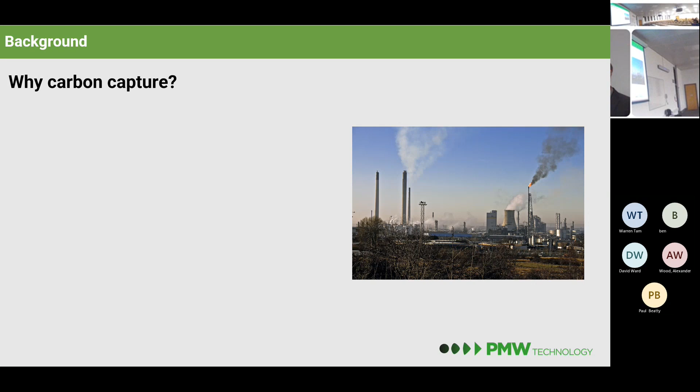Carbon capture. Why do we do it? Why do we even think of doing it? Well, the starting point and ending point for a lot of this is minimising the carbon impacts on the climate change we're suffering. Plants like the one on the right there at Stanlow tip out millions of tons of carbon dioxide a year and make a serious difference to the UK's contribution to climate change. So reducing that is only a good thing, and the sooner we can do it, the better.

Technologies have been a real challenge moving forward with carbon capture. I'll talk a little about those, but also about what we've done and where we're going with our technology.

So the intention here is to cut unavoidable carbon emissions. There are many industrial processes that don't just emit carbon dioxide because they burn fuel, but because of the chemistry of the processes involved. So brick making, ceramics, glass making, even oil refining - there's an unavoidable element of carbon emission from the processes being done. No amount of hydrogen or renewable energy will replace those elements; you have to deal with them as carbon dioxide emissions.

We also have a shorter term problem. By 2050, whatever will have happened, between now and then we've got a whole load of investment in existing plant, machinery, processes, and industries that have a commercial value drawn from existing assets that emit carbon. We can't simply switch off the fossil fuel. We have to move away from fossil fuel in a controlled way that doesn't destroy the economy on the route. So we have to have some means, and carbon capture is one of those bridging routes which will enable us to move from where we are now to an ideally zero carbon future.

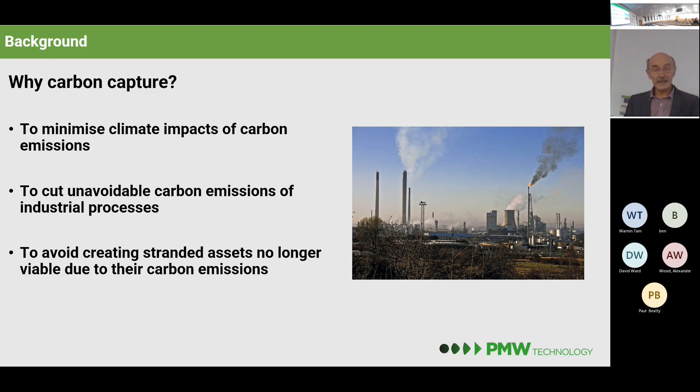One of the key questions with carbon capture is, what do we do with the carbon dioxide? It's all very well saying we can capture it - where does it go, what do we do with it? It's not a simple problem that we can put it in a landfill site and forget about it. It's not that kind of stuff.

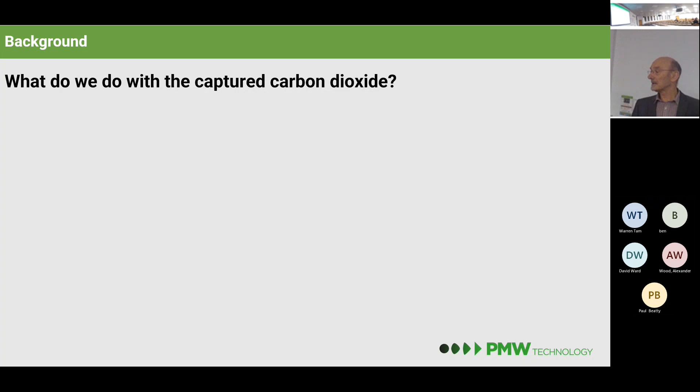So geological sequestration is the classic solution and is already practiced in a number of countries around the world. The point here is that you are basically putting it away under the ground, ideally in a position where the chemistry of the subsurface conditions will ultimately result in the carbon dioxide being fixed in the rock and not coming back. That would happen in saline aquifers, and salt caverns can do those kinds of chemical things. Depleted oil reservoirs probably will hold the carbon dioxide in much the same way as they've held methane and other hydrocarbon gases underground for hundreds of thousands, even millions of years.

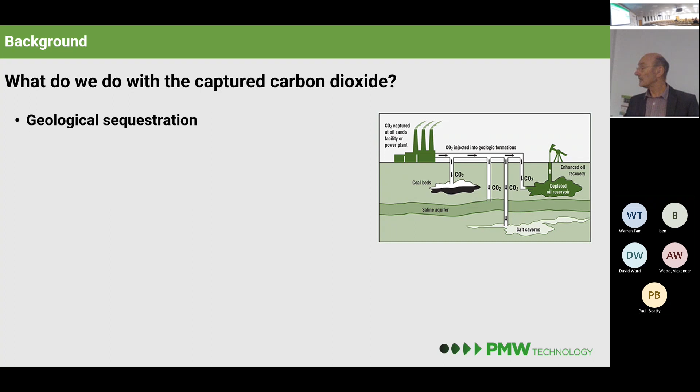So disposal is one way of dealing with carbon capture. It's not ideal because there's always the chance of things coming back before reactions are complete. There are also questions of liability and ownership of the carbon dioxide under the ground. Who is to look after it? Who is to deal with it? Who is to pay for putting that stuff underground?

The favoured option is to use magnesium oxide or hydroxide minerals reacted with carbon dioxide to produce magnesium carbonate. This is basically ground up rock absorbing carbon dioxide and chemically fixing it as a building material, making a form of concrete or plaster that fixes the carbon dioxide as part of a mineral.

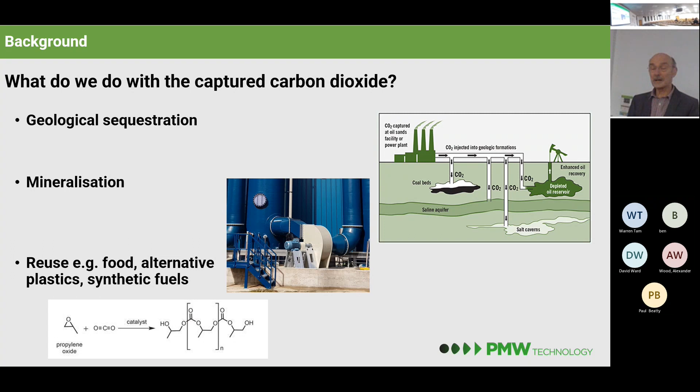You can also create synthetic fuels from carbon dioxide. You can react carbon dioxide with hydrogen to produce methanol, or you can produce methane or other hydrocarbons with varying degrees of efficiency.

One application we see as very attractive is what we call the methanol cycle. For long haul shipping, it's difficult to carry enough renewable energy. Batteries simply aren't enough, and you can't realistically carry around liquid hydrogen as your fuel produced from renewable energy. So forming another chemical compound is a preferable solution.

Producing methanol from hydrogen can be done quite efficiently. Methanol is a liquid fuel, a bit like gasoline. It can be burnt in conventional engines, and you can capture the carbon dioxide on board ship using a process like ours to bring the carbon dioxide back for reuse with more hydrogen, so you're effectively using carbon dioxide as a carrier for hydrogen to deliver it on board ship, and you can take your ship around the world with that.

This is certainly of interest, and we're in discussion with a number of shipping fleet operators who are interested in the idea. If nothing else, because if they own a solar farm in Australia, they can produce their own hydrogen, recirculate the carbon dioxide on their own ships, and become completely independent of anybody producing fossil fuel, so they have complete control over the economics of shipping their product.

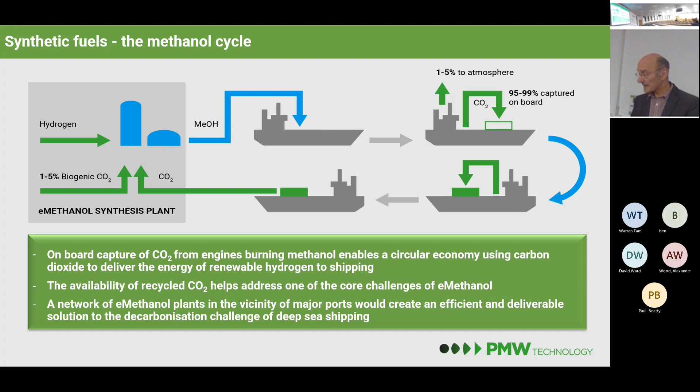So this is quite a valuable step forward, and it really moves carbon capture from being a rubbish processing operation for sequestration, effectively landfill, to being a recycling operation, a circular economy. That's certainly a prospect that is going forward.

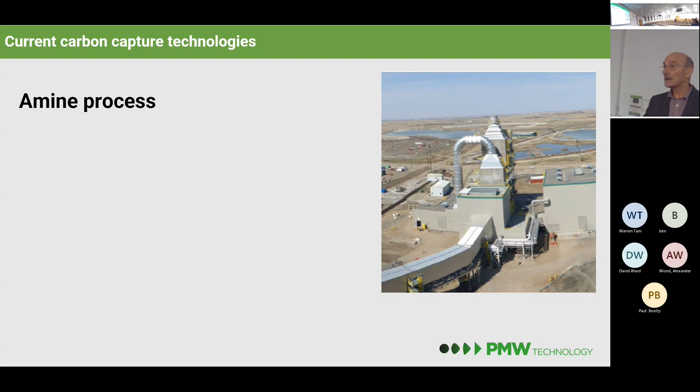Let's look at some processes. The classic process is the so-called amine process. Amines are organic versions of ammonia that will react with carbon dioxide, so basically you dissolve the carbon dioxide in this solution.

To get the carbon dioxide back out again and regenerate your solution, you have to heat it, so it consumes a bunch of energy needed to recover it. This picture here is the Boundary Dam demonstrator plant in Canada that cleans up the exhaust gases of a power station. It's a substantial piece of plant for a relatively small power station.

Unfortunately, the amine solution is hazardous. You don't want to let it out in the environment. It's damaging to natural life, and it's also, unfortunately, bad for human beings, so you don't really want to handle it either.

But worse, the contaminants of the exhaust gases from combustion can often contain sulfur oxides, nitrogen oxides, and that degrades the amine. So you actually have to take a slipstream of amine off to clean it up or replace it with new, which means handling, more processing, more risks to the environment.

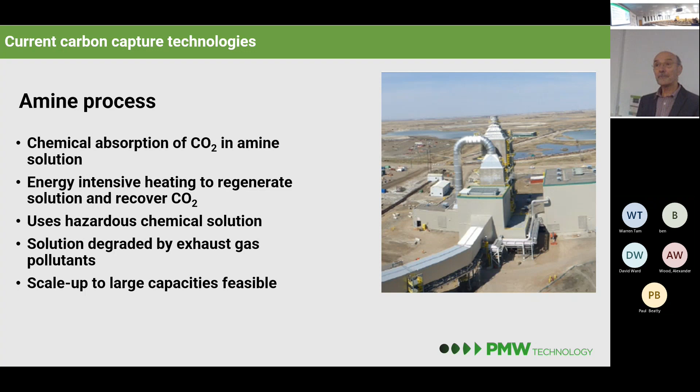One of the advantages of this process is that it is relatively straightforward to scale up. If you wanted one of these things larger than Boundary Dam, it just means a whole load, either more or bigger absorption columns, more heat required to recover the carbon dioxide. But fundamentally, it's a big chemical process, and you can manage that.

An alternative process that's widely used for natural gas processes is the membrane separation process. This has a membrane that is selectively porous to carbon dioxide. Unfortunately, it requires a significant difference in pressure, so we have an energy requirement to compress particularly exhaust gases to do such separation.

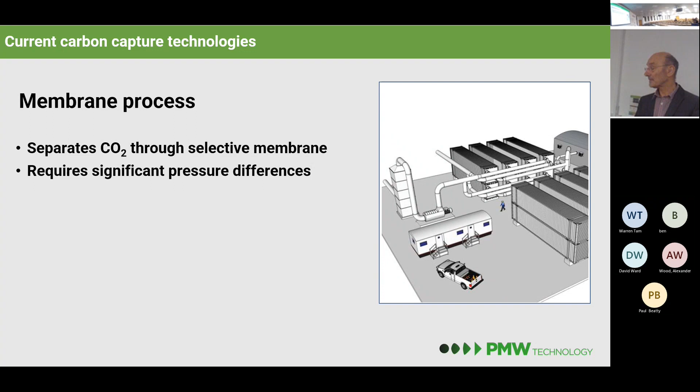And it has limited selectivity, so it will achieve a reasonable separation in one stage, but generally requires multiple stages to get reasonable purity of carbon dioxide and an adequate level of removal, like 90%, from the exhaust gases. So it's energy intensive, and the limited permeability of the membrane means you have lots of them.

So you have crates and crates of stacked up membranes, each membrane being a kind of cylindrical bundle in a pressure tube with the gases coming in on one side, separated gases coming out on the other. Quite a hefty process. And again, unfortunately, contaminants in our exhaust gases are very bad news, as they degrade the membrane so that over a number of years, the membrane becomes worn out and not so selective.

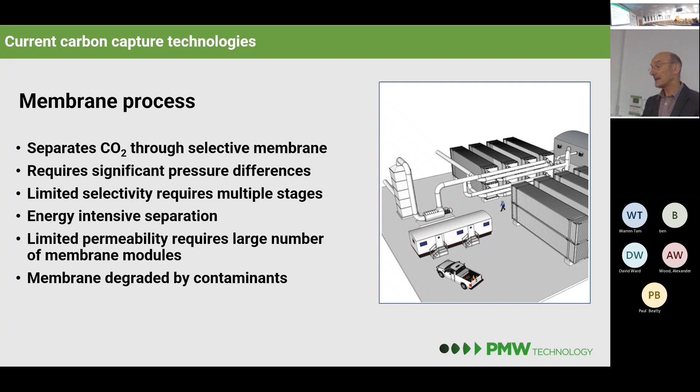So you have to invest in the expensive part of the process being replaced at intervals through life. At the moment, this one is not really considered a suitable process for exhaust gas cleaning up. It does work relatively well with natural gas processing, where there is already pressure to drive the process, and removing say 80% of the carbon dioxide is enough for the purposes.

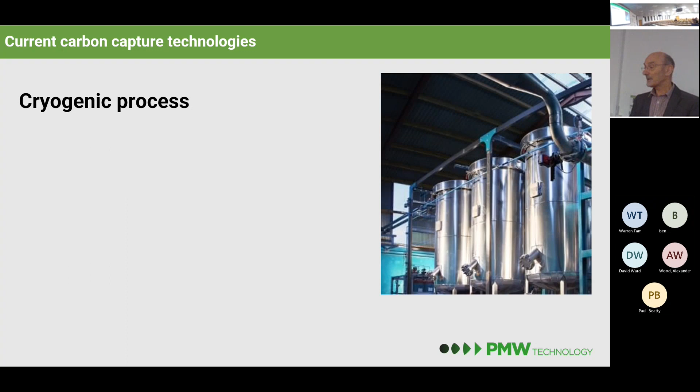And there are cryogenic processes. Ours is a cryogenic process, but the classic cryogenic process separates carbon dioxide by desublimation. It exploits the strange property of carbon dioxide that when you cool it at atmospheric pressure, it never condenses as a liquid, it goes straight to solid frost. So that means that you can run your cold box with heat exchanger, and you will frost up, just like you freeze up the inside of your refrigerator. It will frost up with carbon dioxide on the heat exchanger surface. And then all you do is you switch your heat exchanger to being warmed to melt the stuff or evaporate it off again, and you can recover your carbon dioxide.

Unfortunately, the frost of carbon dioxide on the outside of the heat exchanger degrades performance, so you need extra large areas. And then because you're alternating melting and capturing, you need multiple sets of surface. So it's 3 times as much of expensive surface. So it makes it an expensive process. And the scale up becomes quite difficult because the sheer area of surface you require in your heat exchangers becomes unmanageable.

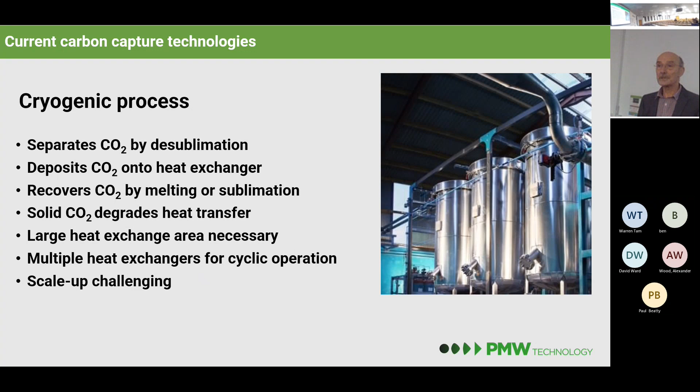So our process is also a cryogenic process. We use low temperatures again to capture the carbon dioxide as a solid. But rather than having a fixed heat exchanger, we use fine metallic beads. It could be ceramic or glass. But the beads act as an intermediary for the cold and capture the carbon dioxide.

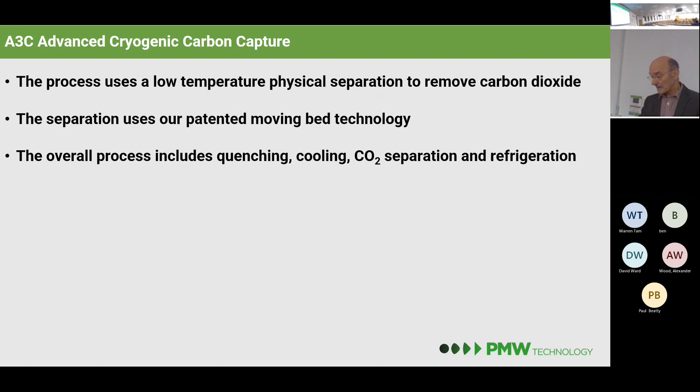Overall, the process starts by quenching exhaust gases to a starting low temperature. Then we have a cooling stage that takes them down to about -100 degrees, which is just a straightforward regenerative heat exchanger, using the treated gases to recover the energy. Then we have a separation step where we cool things further to get the carbon dioxide separated. And we have a refrigeration process wrapped around this to provide the drive to keep the cold.

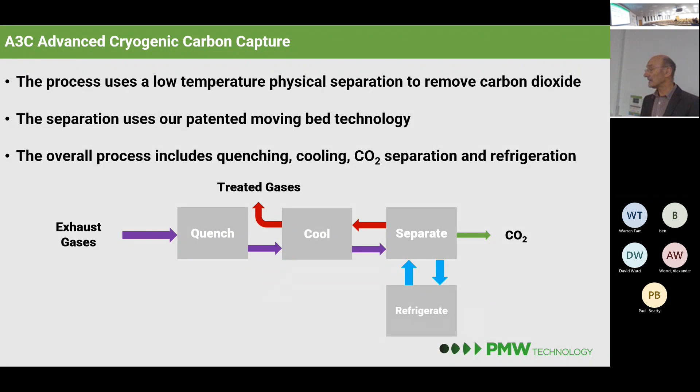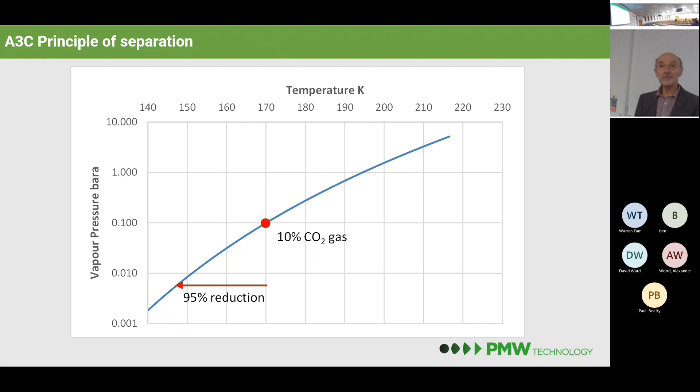We calculated that the energy penalty of going to 99.5% from 90% is only 25% more energy to get there. Whereas the big chemical processes like amine will never get to 99.5% because the column would be hundreds of meters high to achieve an equilibrium over that chemistry. So the process is inherently rather attractive.

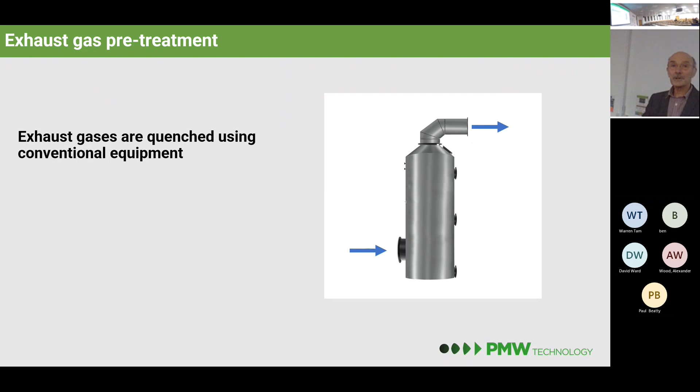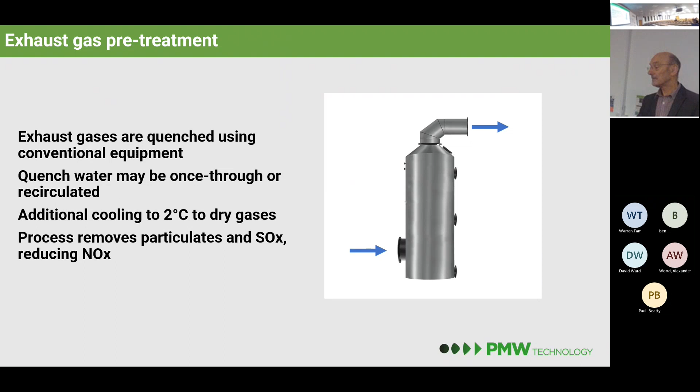The starting point is that we quench, as I said, and we use conventional equipment. It looks like a tank with water splashing down inside it. They can be recirculated, it can be once through. We put some additional cold in because we don't want too much water content of the gases at the end. So we try and get down to about 2 degrees centigrade. And because we're washing, literally, the gases, we take out particulates and sulfur oxides and some of the NOx.

In that process, because we're going down from roughly freezing point down to -100, the traces of water that remain, a few hundred parts per million in the gases, are frozen out onto the surface of those beads and ultimately depart with the exhaust gases. And the contaminants like nitrogen dioxide freeze out and again are released back into the exhaust gases. The other contaminant gases, nitric oxide, carbon monoxide, are present in too low a concentration to be affected by the cold processes. They simply stay as gases and pass through the process entirely unchanged.

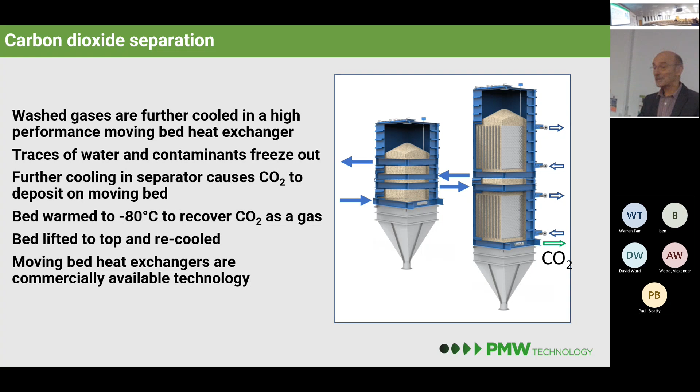These use technology that's relatively commercially available. I've hacked about manufacturers' pictures to produce these images; they're on the web. Refrigeration is an important part of this process and is actually quite vital to how we minimize the energy. There are 2 different processes we can use: there's a conventional process called mixed refrigerant, where you have 2 different gases that condense at different temperatures and pressures.

Or you can use a nitrogen cycle technology, which is like a gas turbine, except being used to produce cold rather than generate power from heat. We prefer the nitrogen cycle because it avoids flammable and difficult refrigerants, because they're often either flammable or toxic or both for the conditions we're dealing with.

And because we have the 2 processes, one of cooling to produce cold sufficient to freeze out the carbon dioxide, and then we're warming it subsequently to recover the carbon dioxide, a significant part of the refrigeration heat rejection is at low temperatures. So we have a very much reduced refrigeration power requirement. We have a remarkable result that we get something like a 60% reduction in the power demand for our refrigeration for the amount of cooling we require compared with a conventional process, because of that heat rejection we're able to use.

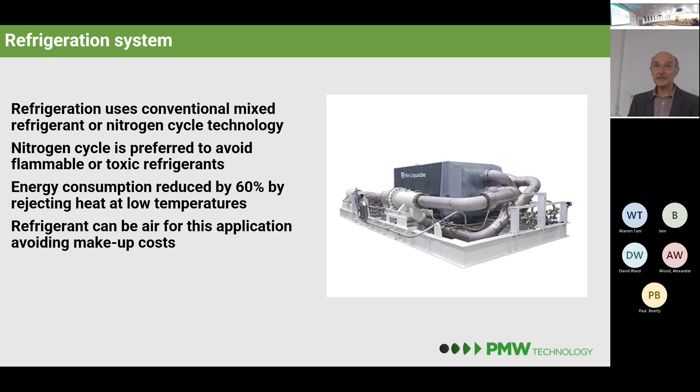And because we're not going as cold as the liquid gas facilities that traditionally use the nitrogen cycle refrigeration, we can use air. So we don't even have to have a particularly clever makeup system for any leak of our refrigerant. It can leak, it's free. We don't want it to leak, it's cold. But if it does leak, and they always do, it's free to replace, which is wonderful.

And again, that's an Air Liquide plant I've got a picture of. They're standard enough items - they're used already on board ships, for example, to re-liquefy vapor from liquid natural gas transport.

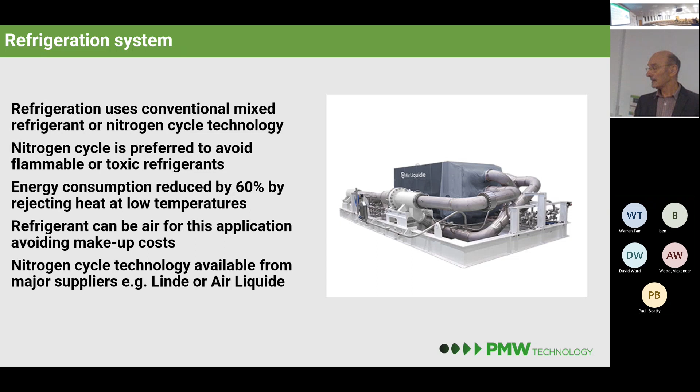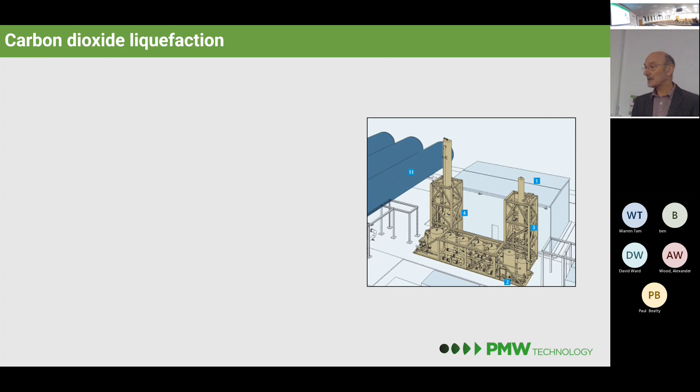Now, the carbon dioxide end we really have to have as liquid, particularly for things like shipping. You can compress it and send it down a pipeline, but for many applications they're too small - you want to liquefy the carbon dioxide to carry it away. And our ships will have to have it liquid because there's no pipeline to a moving ship.

So the advantage of the process is, because it's working over that very small temperature range, it actually produces very high purity carbon dioxide. It's an inherent feature of the process - you actually crystallize the carbon dioxide, and crystallization is another classic purification process. So we have high purity CO2. There's nothing else there - no water, absolutely minimal traces of other stuff.

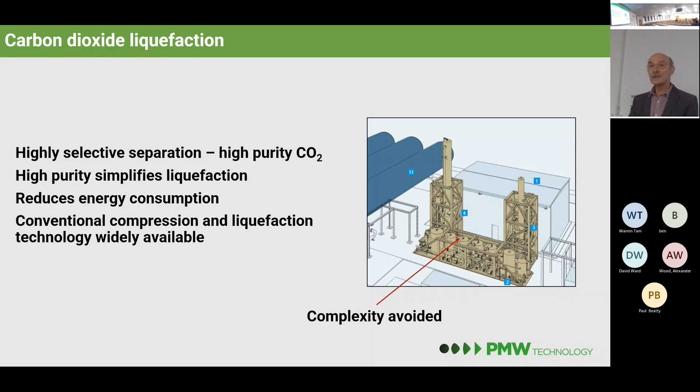That means the traditional liquefaction processes for carbon dioxide, which spend most of their effort purifying, are avoided. So on the process picture on the right there, all that brown stuff is out of Linde's catalogue for carbon dioxide liquefaction - that's purification plant, that's not liquefaction. You don't need it, it's free - it comes pure to start with. So it's a very much simpler process, and that means reduced energy consumption. We can use conventional bits without really making much of a song and dance about it.

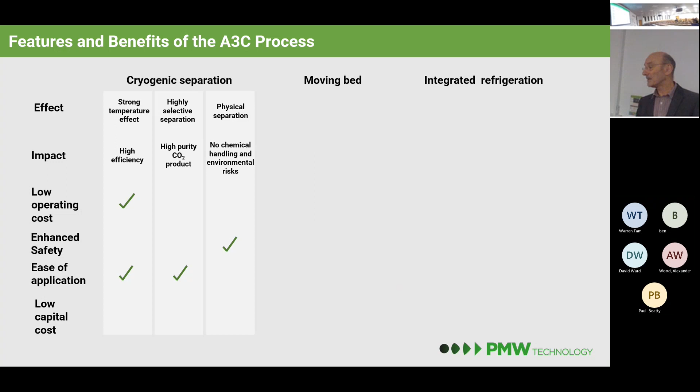So we have the benefits of cryogenic separation with the small temperature differences, meaning we can do the job nicely and efficiently. It's easy to apply because it's highly selective, high purity, and it's safe.

We have a moving bed, and because it's fine material with short paths for gas flow through the bed, we have very intense heat transfer. So it's small, compact, it's thin. In our 100 millimeters typically of bed, we get the same separation as the chemical separation process gets in a 10-meter separation column. So we're, what's that, 1,000 times better? 100 times better - it's quite enough.

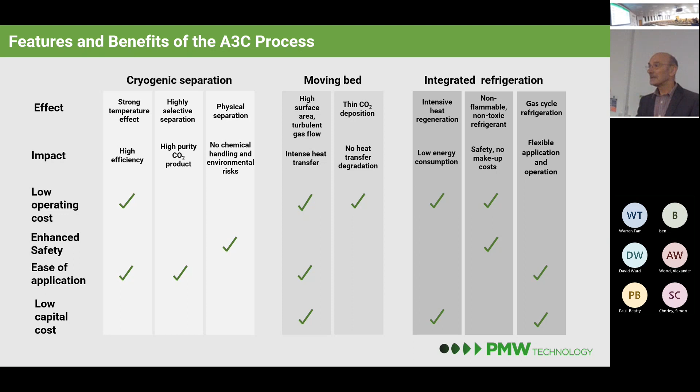And because we've got a very large surface area to capture our carbon dioxide on, we don't suffer from the heat exchangers being frosted up - it's just too thin a layer to matter. And because we integrate the refrigeration, we have low energy consumption because we're rejecting heat within the process at low temperatures. We have a nice straightforward refrigerant that is non-toxic and doesn't cost us anything to make up. And the gas cycle, unlike other refrigeration cycles, we're not dependent on the properties of the air, other than the fact that it doesn't freeze or boil or condense. That process means we have a very flexible plant - the refrigeration can be used for a wide range of carbon dioxide concentrations.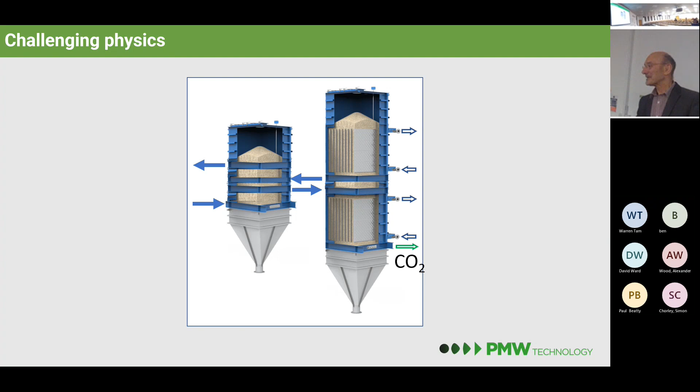Right, so the challenging physics. Here we see the core of the process, which is where the core of the challenge comes. We've got a number of places where we have a significant issue: the material we use for heat transfer, the moving bed, is moving, and we can always have problems with how it moves. So achieving an even bed flow distribution through the process is rather vital. We have an interesting challenge managing the heat transfer, because bed material is porous and doesn't conduct heat wonderfully, but we've got to do our heat transfer efficiently and effectively. And in the more complicated situation where we're doing desublimation of carbon dioxide onto the beads, we've got to manage that heat and mass transfer and understand what's going on to scale that effectively.

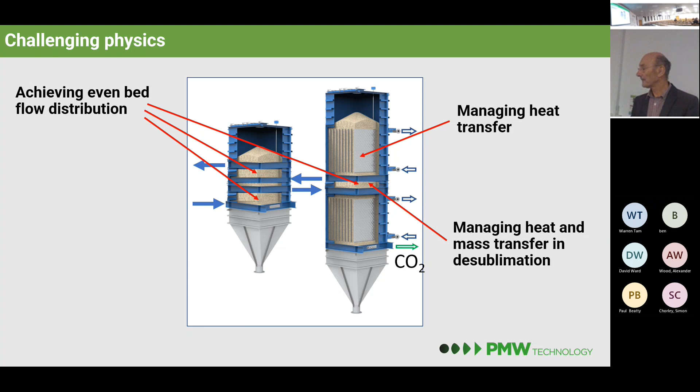So, first degree of challenging physics: we have the bed flow problem. Or not - it won't flow that easily. Bed flow is a challenge and has been for a long time. The classic situation you end up with is no flow, because the material goes down the bottom and makes an arch - it just plugs up the bottom of the silo.

The next form is what's called rat holing. It's a wonderful idea, but basically it goes down the middle and you don't get a uniform flow. So if you had a heat exchanger or gases injected across the width, only the middle bit would see moving bed, the rest would be static - useless. And only the right-hand side, which has only really been understood for the last 60 years unbelievably, is what's called mass flow, where the whole lot is moving gently together.

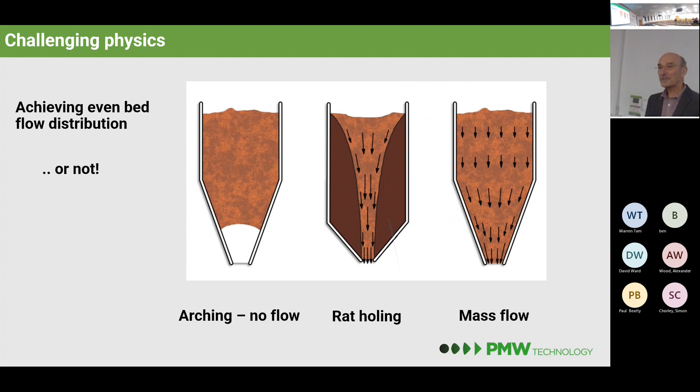It's only been for that length of time that people have been able to design silos to do that reliably. So all those coal-burning power stations we see precede that time, and they had forever problems with the mess of low-grade coal they were burning, clogging up, jamming their hoppers, which are just big silos. They had air cannons to disturb it, sledgehammers to move it. It was not a problem that was well solved.

So the leader in this was a man called Andrew Jenike. He was originally from Poland, and he went to America and worked on silos in the 50s, trying to understand what was happening. It wasn't until the 60s that he got enough experimental and theoretical work done to be able to design a silo for iron ore crushings that would work reliably. What he had to do was relate the material properties and the silo wall and silo geometry. On the right there, you see a picture of what he had drawn - he had two different parameters: the wall friction angle, which is how easily the material flows down the wall, and the hopper angle.

Thank you very much. Thank you - I deserve this, I think.

He categorized the flows he could get into mass flow and funnel flow. Obviously you don't want to be in the situation of having arches, so he was out with that region, and his angles were quite a lot shallower - much steeper than had previously been used to achieve satisfactory behavior. His shear tester allowed the material properties to be understood, effectively rubbing the material against a sample of the wall to measure the wall friction factor, and shearing the material against itself to measure the internal friction forces between the material. So he defined those criteria, enabling science to move forward.

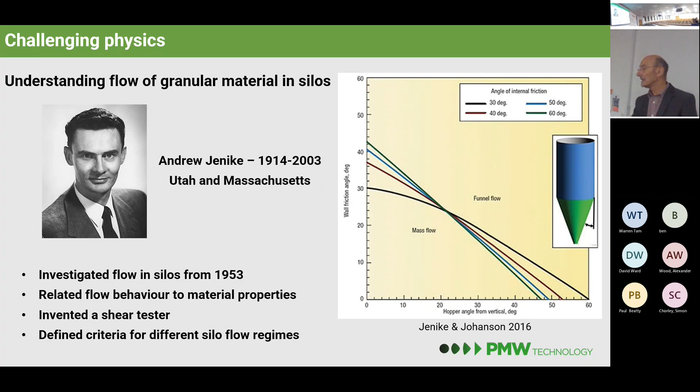Moving to predicting those behaviors from a theoretical point of view, outside the empirical measurement of those parameters, has proved very hard. It works at every scale, from the microscopic interaction of the particles, which can be powder or small beads, all the way up to quite large lumps.

But it's within a silo that can be meters high, meters in diameter. So it becomes a very difficult problem of scaling, that the internal and external pressures within the silos are not obvious, and they have quite a strong effect on how the material sticks together. If it's a bit damp or finely divided, the material can stick together, agglomerate into a lump. It can be very difficult to handle. And so the large range of scale means that the phenomena are very hard to handle, and the modeling and analytical stuff is difficult.

Discrete element modeling, which is a way of dealing with many particles, is really defeated by the fact that you're talking about 10 to the 9 particles. It's just going to take too long to do the computation. It has been done, and they do horrendous runs that take a fortnight to analyze behavior, but it's not really very rewarding, and it's not a particularly effective solution in the end.

And you have multiple conditions within the silo, that you have sections of flow, perhaps in the outlet, where the material is so divided it's behaving more as a gas. You can have in the throat, it's actually flowing much more like a liquid. And in the sections higher up, where it reacts to the wall and in itself, they're much more behaving like a solid with internal friction processes going on. So the technologies of applying CFD and actually getting meaningful results from that are relatively recently developing towards the point where you can use this kinetic theory of granular flows, for example, to actually understand what's happening and to reflect the different modes of operation of the material.

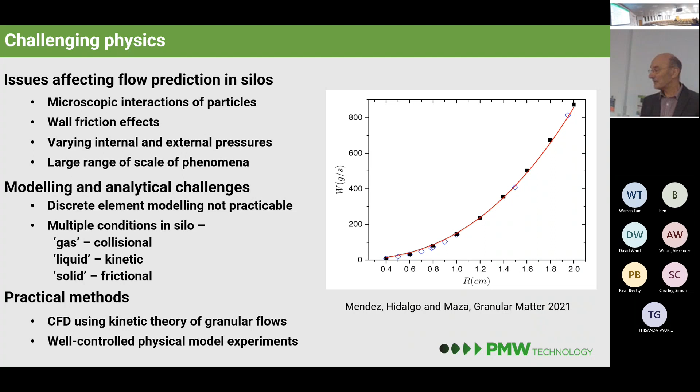Heat transfer, it's always a good one. This is now quite a popular topic because the use of bed materials, for example, for solar energy capture, where you have solar towers reflecting the light up onto a heat receiver. If the heat receiver uses a stream of sand or ceramic material, you can get very good capture and your moving material doesn't melt, doesn't do anything disgraceful, and you can then transfer the heat to a thermodynamic cycle.

You have the problem that the interstitial gas is the main conductor, but the actual contact points of the beads doesn't make a huge difference, that the results are not always that encouraging. You've got movement so that you haven't got a consistent pattern of contacts. And you've got whatever bed flow distribution you get, the friction down the sides. Are you going to get a nice uniform mass flow, or are you going to get some kind of funneling going on here? You can solve the problem analytically. I've done this. It's not straightforward, but it's doable.

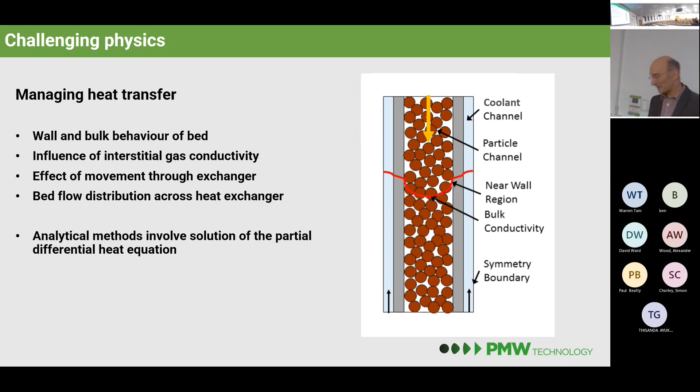The famous partial differential heat equation is quite heavy-handed. You have to look at the right solution and see how it works, but you can use that to estimate the performance. And in fact, our estimates, when we look back at experimental results on our pilot rig, we're within a factor of 2 of the right answer from analytical. I think that was quite good going. Heat transfer is a terrible problem, really difficult to predict what you're going to get.

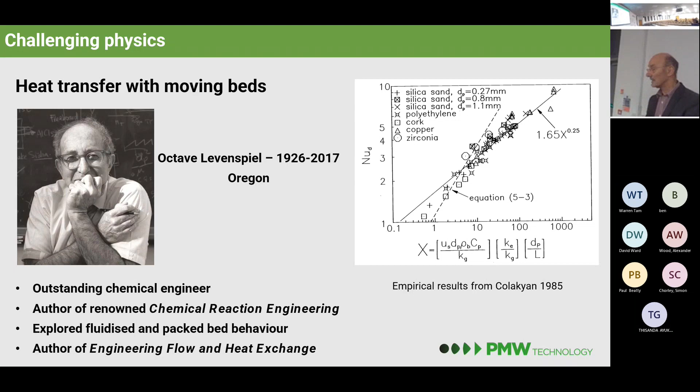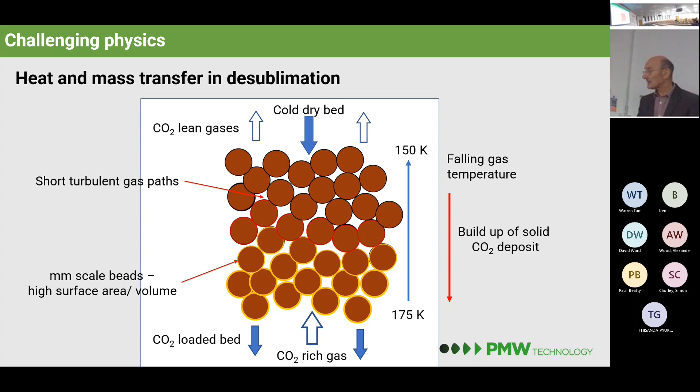What we did, looking at this, is we thought, right, we need an empirical evaluation of the heat transfer coefficient. We can't actually work out what the implications of the carbon dioxide will be, but let's look at the measurements and calculations of others. That gives the top equation, the first one we thought was a credible value for the heat transfer coefficient. And then a similar thing from work done by KTA, the German nuclear research group, who were looking at pebble bed nuclear reactors, where you have golf ball or tennis ball sized lumps of graphite deposited around a core of uranium oxide, the nuclear part. Those balls would simply be heaped up in a column tube under helium at high pressure, and the nuclear reaction would heat the helium being blown through the bed. So they did a great deal of evaluation of pressure drop to work out what would happen in their reactor. And that approximation, empirical data on the right, those equations, unlike pressure drop down pipes and things that you see.

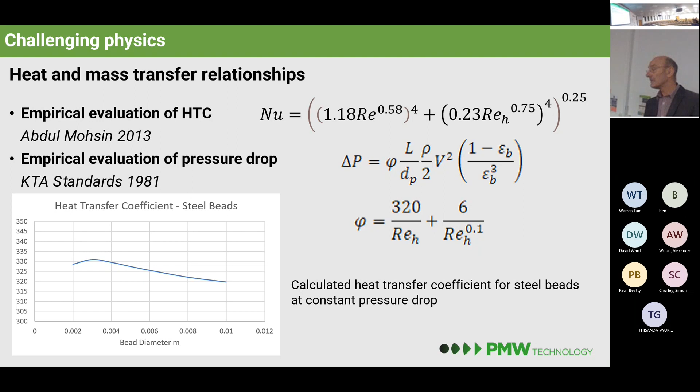And we then said, well, let's just analyze what happens. We have a variety — what is the range of bead diameters that would be reasonable? So we chose 2 millimeters to 10 millimeters. Let's see what happens. And what we calculated was for a constant pressure drop through a bed of those beads, we had nearly identical heat transfer coefficient. So what have we done wrong? How is this happening? What magic is going on here? Why are we getting a constant heat transfer coefficient for that level of flow? What's happening?

And we had to go back to the great master of fluid dynamics, fluid mechanics, Osborne Reynolds, an early academic, one of the first professors of engineering appointed in the UK. He was appointed to Owens College, now part of Manchester University, and he established the key laws of fluid dynamics, doing famous demonstrations of laminar, transitional, and turbulent flow of fluids in pipes. He had a famous rig that he took around to show people with his glass tube, and he injected dye into the center, and at low flows the dye would remain as a line down the middle, and as the turbulence went up with the flow, it would break down at one point or another down the tube with turbulence, demonstrating the thing.

And he created this dimensionless measure, the famous Reynolds number, that measured the difference in properties of the fluids, so that you could compare different fluids in different operating conditions and predict when they would be turbulent and when they would flow in a laminar manner.

And he had very wide interests, much wider than that alone, looking at the mechanical and thermodynamic behavior of fluids and heat transfer. He came up with an analogy: the processes of heat transfer, mass transfer, and pressure drop were all related to the same mechanism. You imagine quanta of material effectively being transferred across a gradient of velocity, temperature, or concentration, so that they were delivering a chunk of momentum, in other words pressure drop, to the wall, or dumping a load of mass to the wall because of the concentration gradient.

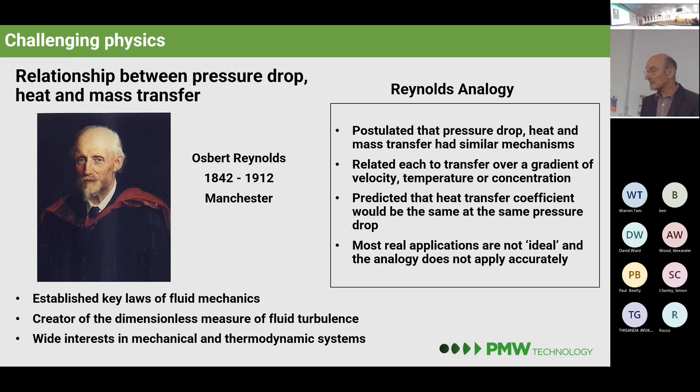Now, our challenges aren't finished. As I said, the modeling and understanding of bed flow through the system is a real challenge. Measurement of the local bed movement rates and the measurement of how much carbon dioxide we've got on a particular chunk of bed material are very difficult things to measure.

Today we were experimenting with a bed movement detector that would actually sense the passing of the individual beads as they move down our rig. It's partially successful, but there's a lot of work to be done to make one of those go, because you're dealing with particles of the order of 0.5 millimeter in diameter, and you want to measure a movement of a few millimeters, less than a few millimeters per second, passing a particular point in the rig. Quite demanding.

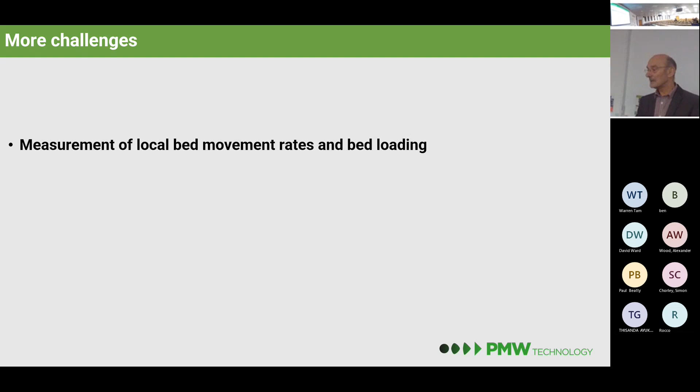We've got another complicated problem to do with heat transfer in the lower section of our process, where we're actually warming the bed. The carbon dioxide has been deposited on those beads, so then you're warming that. What happens? Near the wall you're raising the temperature, so some of that carbon dioxide is going to evaporate and condense in the bulk. So we're complicating the difficulty we already have with wall-to-bulk transfer by the fact that we've now got carbon dioxide evaporating and diffusing into the bulk, and condensing again, and desubliming again.

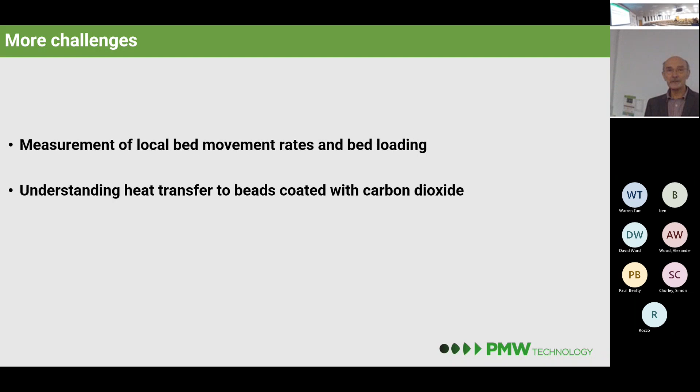So how does that affect the heat transfer? Our primitive assessment says it's about a factor of 3 better as a result of that phenomenon. But it's not yet clear that that's what the limit is.

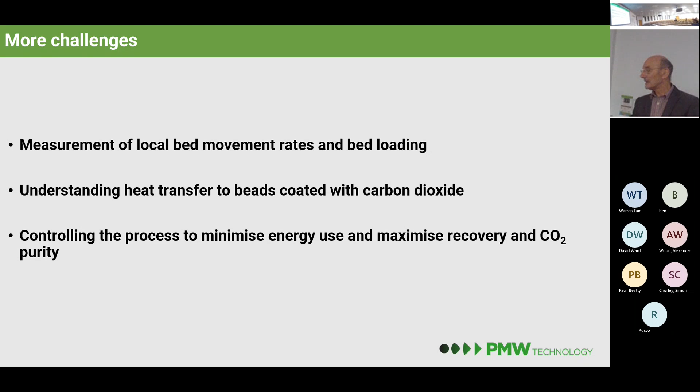And we have a very sophisticated process here with a variety of things going on, and controlling that process to minimize energy use and maintain conditions appropriate to desublimation with a varying carbon dioxide content and a varying flow of exhaust gases. Very few industrial processes sit absolutely steady for days on end. Put it on board a ship and it's coming and going - when you're going to port, you have to handle it. So quite an interesting challenge to manage that manufacturing operation.

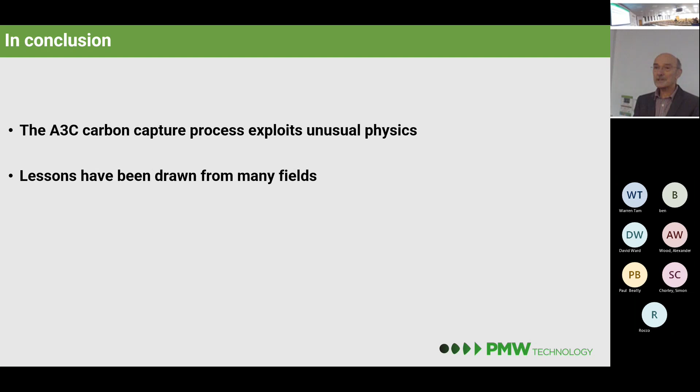So, we do exploit unusual physics. We have to understand it and make it work. We've had to cast our net wide to work out where and what will guide us. We've also had to work out some of our own solutions, not all of which have worked. And the work is by no means finished - we've got a lot to do before this is going to be fully commercial.

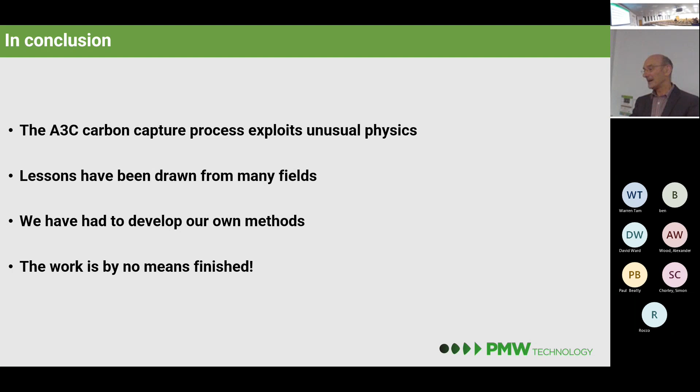We'd love to have one of these things working in a couple of years' time at scale, and it may happen. We've got interesting discussions going on.

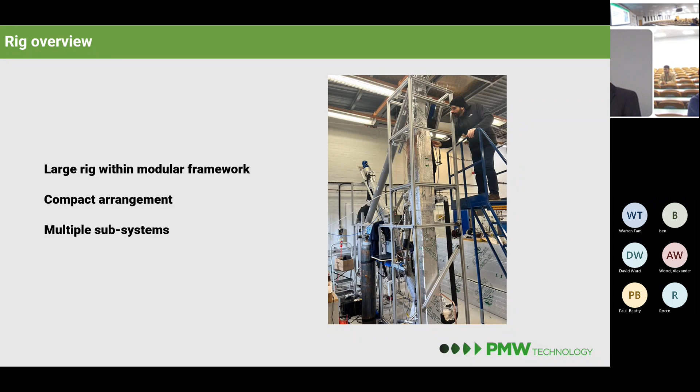So our pilot rig, it's a big structure. Here's George perilously at the top, servicing part of the equipment. We have a test diesel engine.

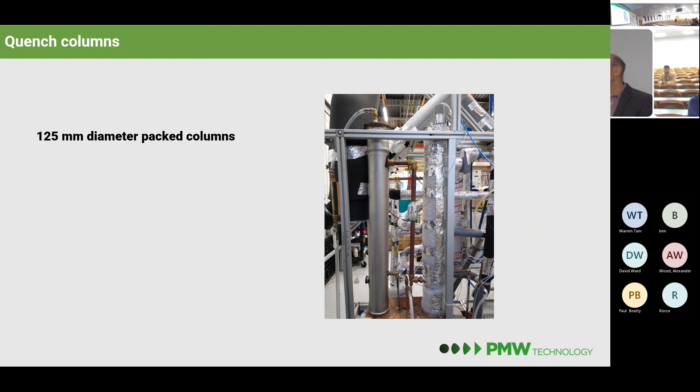We have the pack columns here - they're 125mm columns packed with commercial packing. First water quench and the second one, chilled water. We use a high quality beer chiller to produce cold water. We don't drink the result.

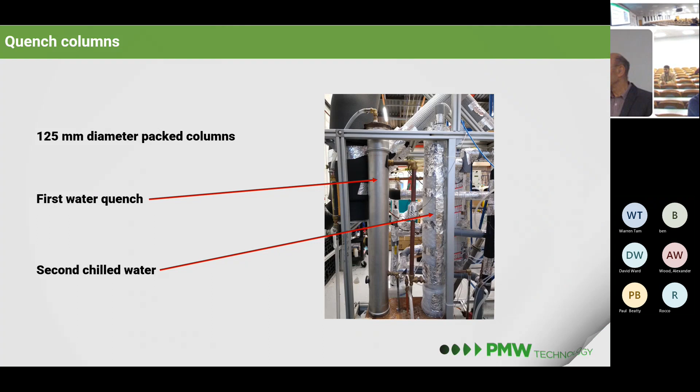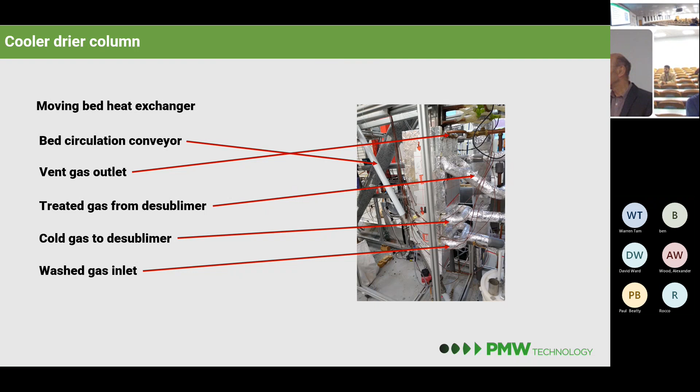The column itself is all wrapped up in 3 layers of insulated polyurethane insulation. Top is the bed cooler, and that's the entrails. It's quite a thin thing, but it's a plate heat exchanger with bed flowing between pairs of plates.

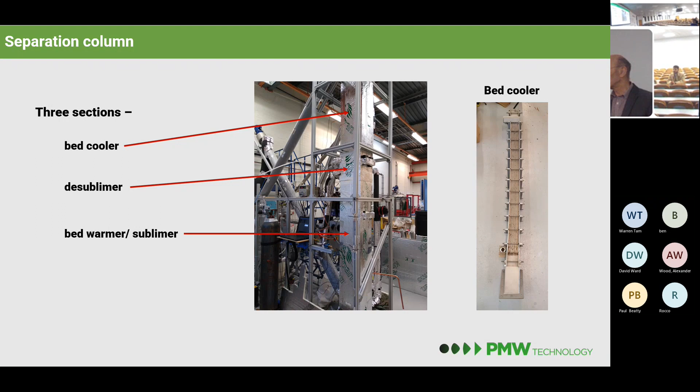Compressed air flows through, cold. We have a desublimer, which is just a box through which the gases flow and the bed flows the opposite way. And the bed warmer sublimer, which is a lovely thing made of plates.

I think Dirash had a go at this one. The metal plates are all fixed in a box, and they do the electrical heating to warm the bed to get the carbon dioxide out. That comes out at the very bottom of the column there.

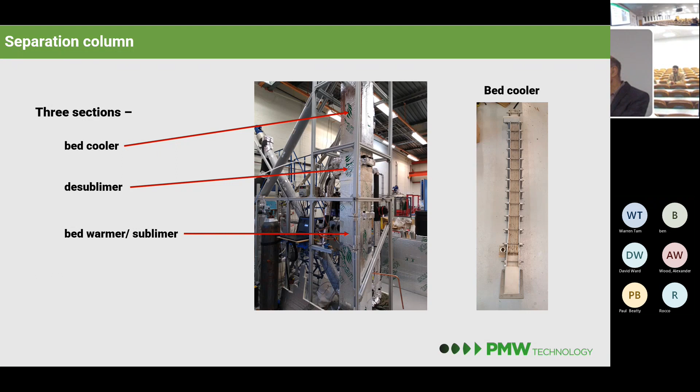Then we have our cold source, which is the liquid nitrogen dewar. We condense the air and mix condensed air back in with a venturi - quite a fierce piece of rig design, really, and it's been very interesting to learn how to drive it and make it work. But it does get very cold. And then we have an ejector that recirculates the compressed air around.

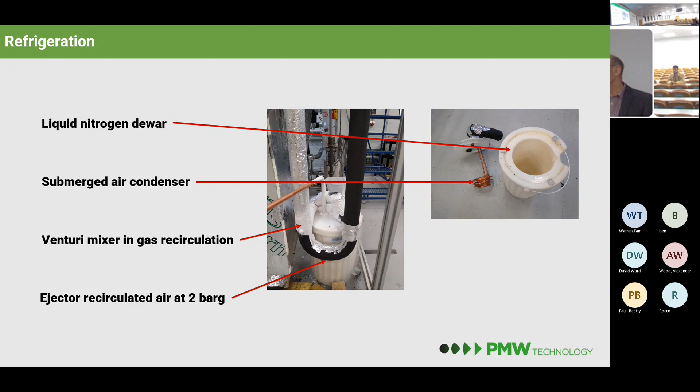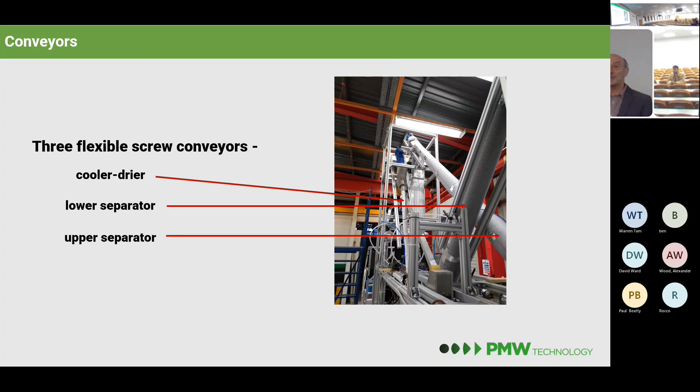We have 3 flexible conveyors - one we've seen before for the cooler dryer, and 2 others for the separator. It makes a kind of D shape, so we lift in 45-degree steps.

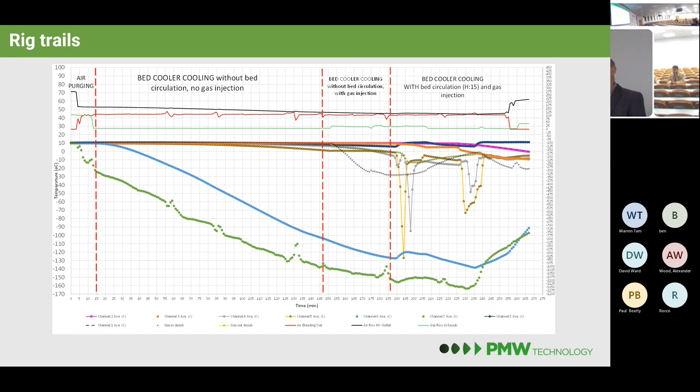And here's some cooling data. This is when we cooled the rig as far as we could get it to go. You see the coldest line is the cold gas going into the heat exchanger from the dewar. Those spikes and lumps are because it's actually quite hard to manage - you have to keep topping it up with liquid nitrogen to the right level, not too much, not too little. And then finally, the tail end of that, we run out, because that's what happens. You never have enough liquid nitrogen.

Oh yeah, that's what we've been doing. I haven't got any more pictures of exciting things here, but the runs are very interesting to do, should we say - the liquid nitrogen steaming across our feet.

Sounds good. Any final question?

Do you offer any placements to students? We have done, yes. Ben and Diraj were on the team last year. We're not quite sure what's happening this year because we're having to relocate from our present workshop laboratory space, so where we'll be in April is not quite clear. We're hoping to be moving somewhere elsewhere on the Thornton site.